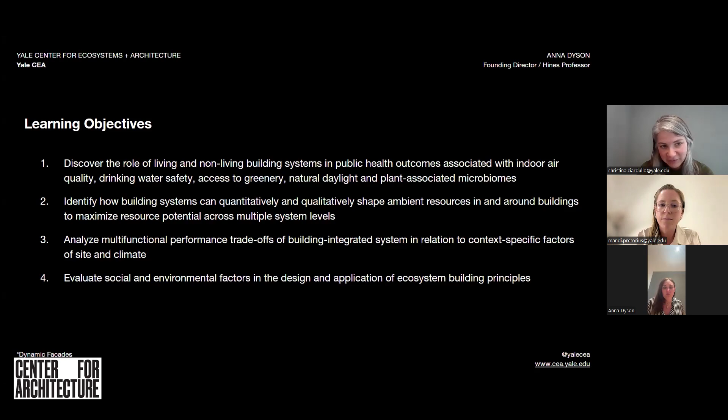Today we're going to be looking at three different system areas: energy, air, and water. And Anna, if you want to.

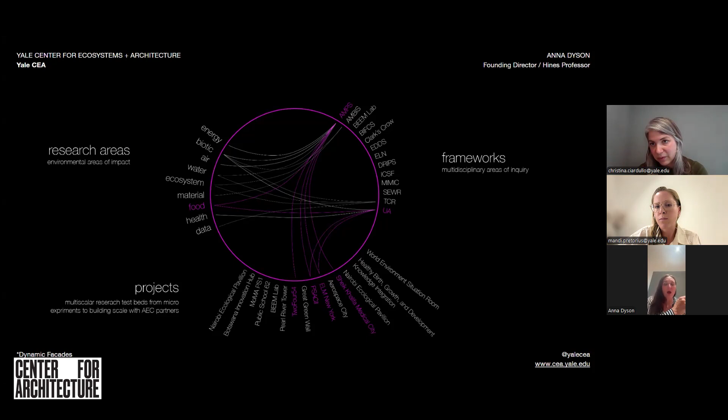Sure, this is a great diagram that Christina put together that shows the interrelationships in the way we parallel track. The projects would be building projects, so if anybody has building projects with the ambition for a next-gen system, these frameworks relate to our research areas of inquiry. All of our systems look at the nexus between energy, water, material life cycle, air quality, etc., but we tend to drill down on each of these areas in specific ways, which we'll show in a minute. Next.

Next, that's a system we'll show you, but just a few words about our center: we are really intersecting, as we said, all of these different fields.

One of the things we try to do is create new types of frameworks for learning. One of our frameworks is called SEVA, Socio-Ecological Visual Analytics, and we have BEEM Lab, Built Environment Ecosystems Measurements Labs. You're looking at an image of a group getting together in BEEM Lab, where you can see the physical model in the foreground, but also a fully immersive environment that's enveloping and wrapping the whole room.

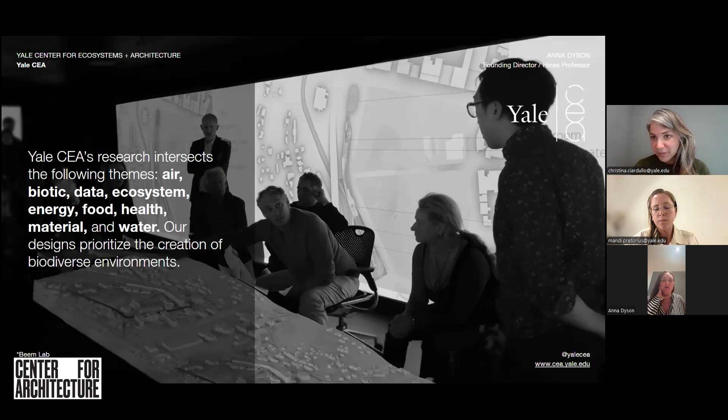We recently demonstrated the first pass of our Drought Resilience Observatory in Saudi Arabia in another BEEM Lab, and we will be demonstrating the BEEM Lab concept also at COP30 in Brazil this November. So we do a lot of international events where we bring people around the table to look at the interface between ecosystems and built environment.

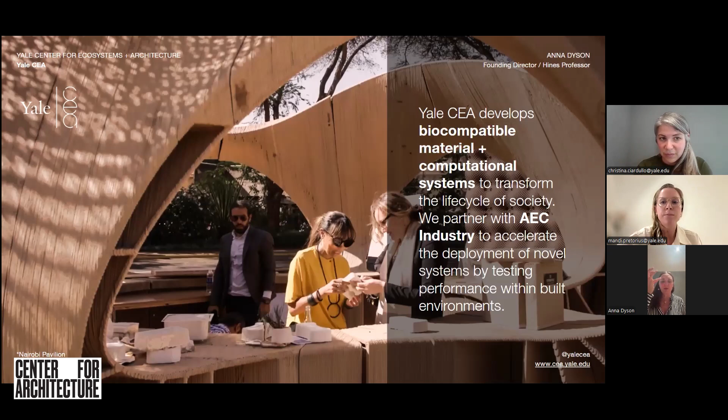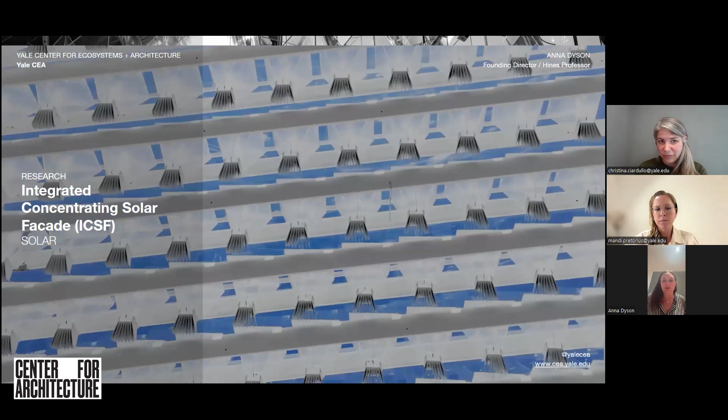Christina gave the title of this talk as Beyond Efficiency. So we don't want to just bean count the photons and electrons around the room. We want to say, are we giving beautiful daylight? How much daylight? Are we taking the heat off and being able to redirect it or store it for really usable purposes? Not just hot water, maybe that would be the lowest hanging fruit, but potentially drive cooling with a higher temperature heat. So this is a very, very ecosystemic system, even if it looks very mechanical. Here, this is looking at a video inside our ecological living module.

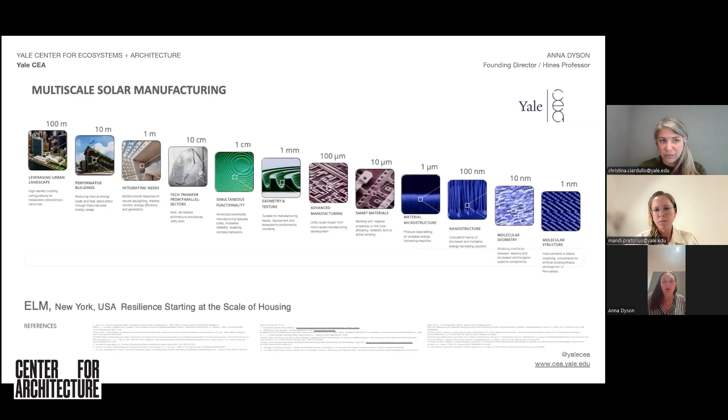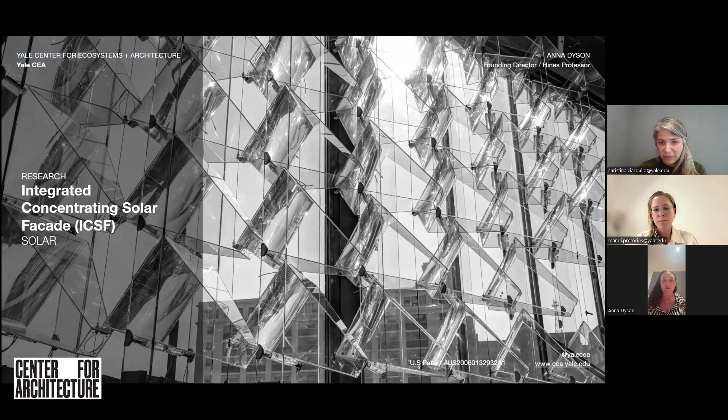So next. We can probably go quickly through these next ones. I'm going to skip through this. This is just to say that we are looking at the ecosystem at all the scales, all the way down to nano. So these are systems that are literally nanotechnology. They're optical, it's semiconductor, it's all of these things coming together. Here's another view of another version of this system in New Lab. That was actually the window that you were just looking at. And this is a diagram.

As you all know, conventional systems are probably 14% efficient at best if they're being well maintained with a conventional solar panel, but it's really only doing that. So you can imagine it's wasting all of the rest of the heat. Sorry, all of the energy is lingering around the building as waste heat if you're in a conventional hot, humid climate like we are in New York City. So you might actually have a net negative with a lot of solar panels, depending on the way that they're installed. They might be heating up your building when you're trying to actually take electricity off.

So this is really giving you the principle of all the systems that you're going to see today, is that we want to be doing so many things with the energy that's coming through. And in this case, I would say it's still a system that's far more advanced than a lot of the systems that you see on the market. But it is using all of the known technologies that we have today. The novelty is in the assembly. We don't have to actually invent a material for this to work. Next.

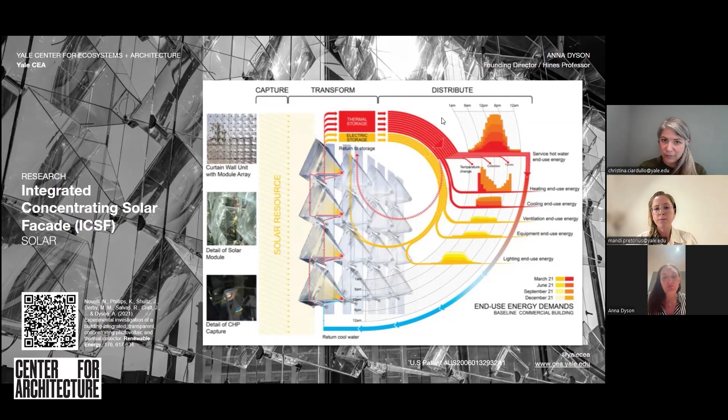Next, Christina. Yeah, sorry. In this case, we're actually inventing the materials. So on the right-hand side, oh, sorry. If you just, sorry, just with the advanced materials.

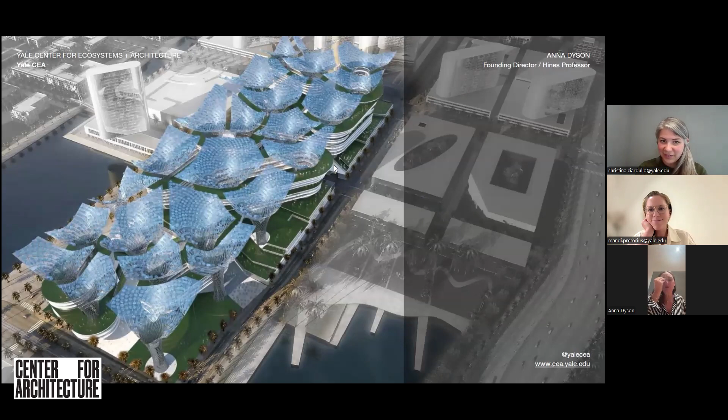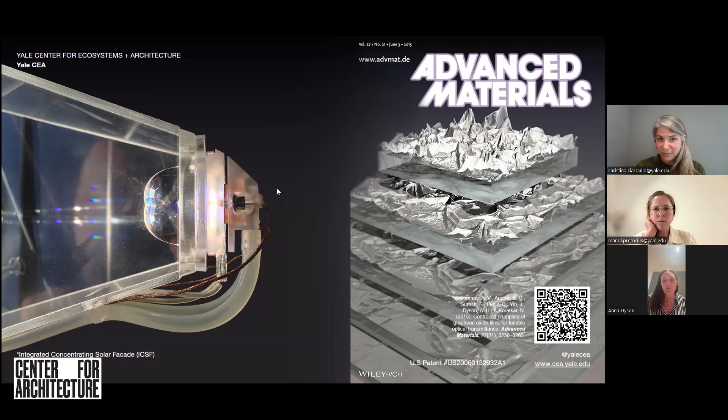So scaling up to the very large scale, this is an example of a competition that we did with Skidmore, Owings & Merrill. We were working with them a lot on speculative projects, but also on built projects. And this is looking at how you can literally transform the climate. This was the Middle East, where there's a lot of sun that you can collect, but you can't really spend much time outdoors. So these larger scale solar collectors are able to create a complete microclimate underneath those umbrellas, so you're outdoors, and it can also become a generator for the rest of the neighborhood. Next. Next.

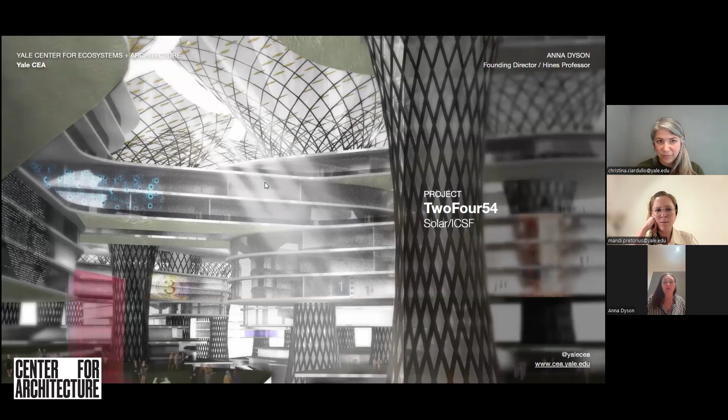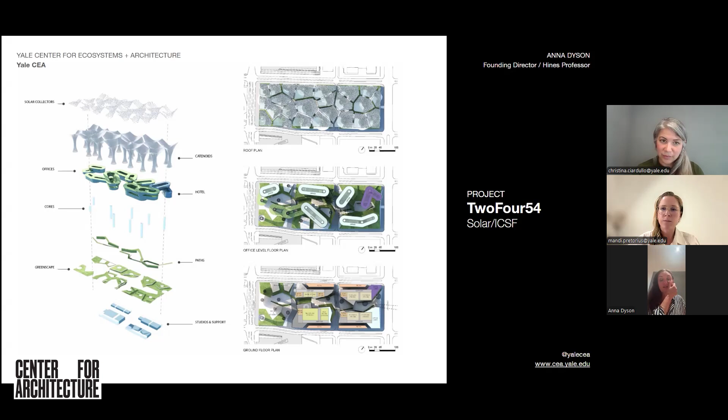So this is an ecosystemic approach where we were looking at everything from airflow to the vegetation types to water retention to water collection. Those big canopies were also obviously collecting water. This is probably as large as we would go, district scale. Sometimes we are interfacing with folks from NASA and NOAA at the regional scale, so we go all the way up to regions and sometimes countries. But really, our sweet spot is a few blocks at the district. You can do so much in creating a completely self-sufficient ecosystem, if you will. Next. Next.

So you can see the vision of the savanna from the window. This is an early rendering, but you can see the concentration of biodiversity inside these courtyards, which has really come to fruition in the photos. Next. Hopefully we have some photos of this. Yeah, and you can see how the floor plates were remaining very shallow so that we can actually power them through the ICSF solar facade. This is a rendering of the ICSF solar facade inside those clerestory windows facing north, because this is the southern hemisphere. Next.

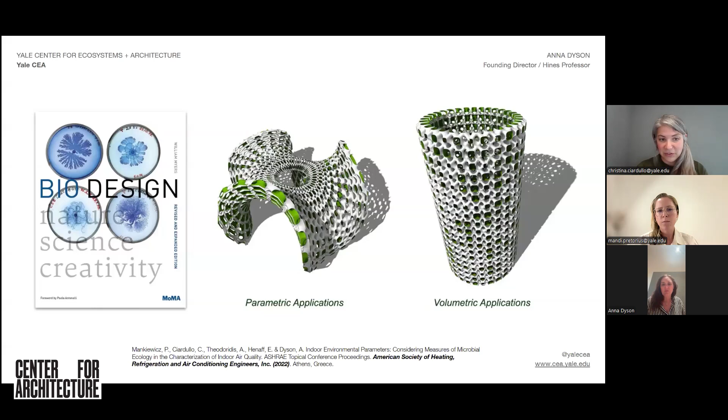And there's been many iterations of this. This also has some history with NASA research and creating enclosures that can breathe from within. We often talk about fresh air from within the building. We want to be able to reduce the energy that it takes to ventilate and heat and cool that air that's coming in. So if we can recirculate clean air in our buildings, we're really also reducing energy at the same time. And these designs have evolved over time and been featured in MoMA and in many other places.

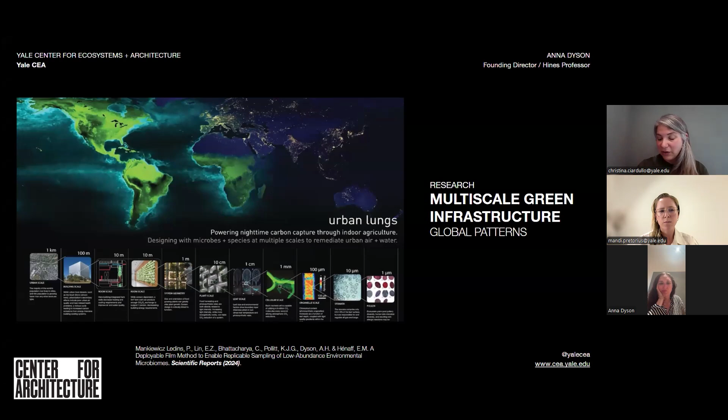And we really, again, in every one of our projects, think at this multi-scalar level. We think about what it's doing at the scale of the globe down to what the root systems and the microbes of the root systems are doing, and how that all impacts and compounds on each other and influences how we were able to scale these systems and what they mean and what influence they could have.

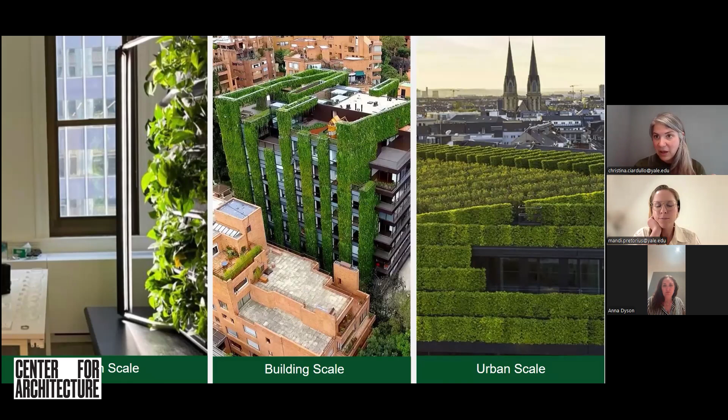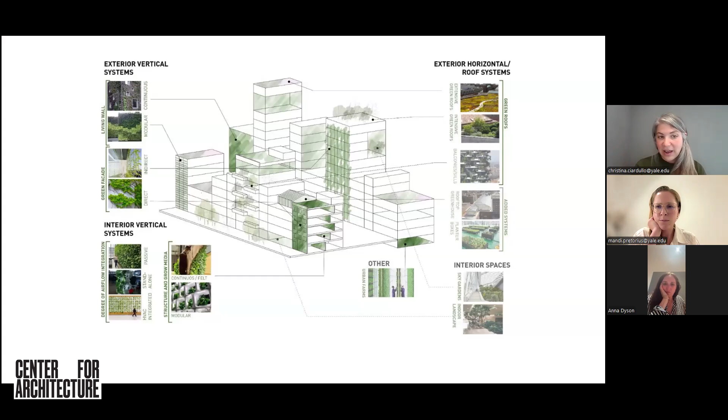So while the AMP system is one type of system, there are so many different what we call building integrated vegetation systems, everything from green roofs to green walls and trellises, and of course our active indoor modular system. And all of them have different performances. And regardless of us drawing them, the mandates are coming for them. This is an older list of municipalities that are starting to mandate these things. And I think we're headed towards more and more of this.

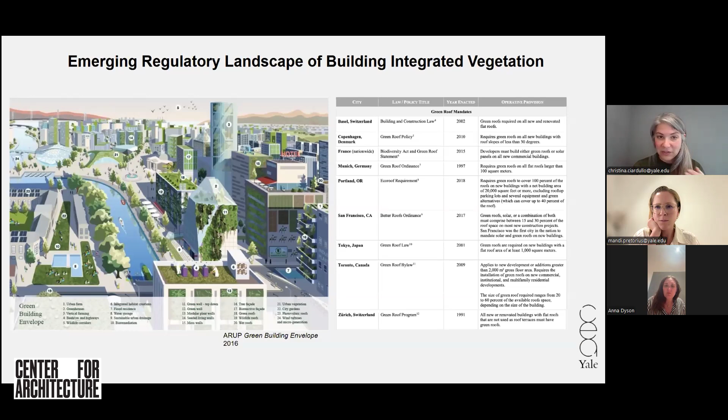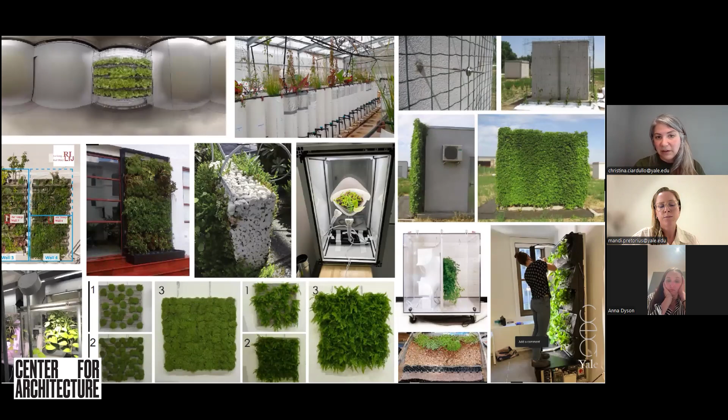So there has been a consistent body of research in many, many different fields in order to understand what is the performance of these systems. And we are doing an incredibly large amount of that research here at our center.

And we're using that information that we get at the system scale. We're developing these systems, we're prototyping these systems, we're taking data, we're measuring them at a room scale or a zone scale. We're taking that information to bring that back to what kind of performances do we need to get out of those systems. We're projecting that into what does that mean for the impacts that it can have at an urban scale, whether that's energy or air quality or other things.

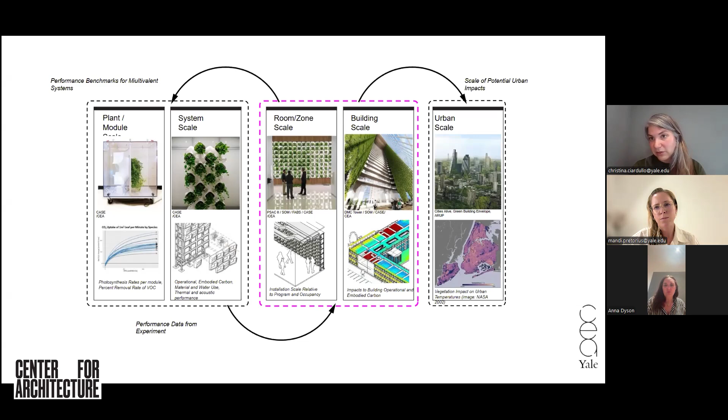And this is sort of the hope, that this research not only lives in science centers in multiple different scientific areas, but that we can understand its impact and influence so that we can start to understand how these systems can become more viable. And there's not only one way that we can value these systems.

And one of the projects, sponsored also by the AIA, was understanding how are we going to value these systems? How do we understand the value of them? And how do we understand the performance of these systems? And, as we said, there's many different almost siloed disciplines: someone is looking at water quality and stormwater management, and somebody else is looking at carbon sequestration, and someone else is looking at biophilia.

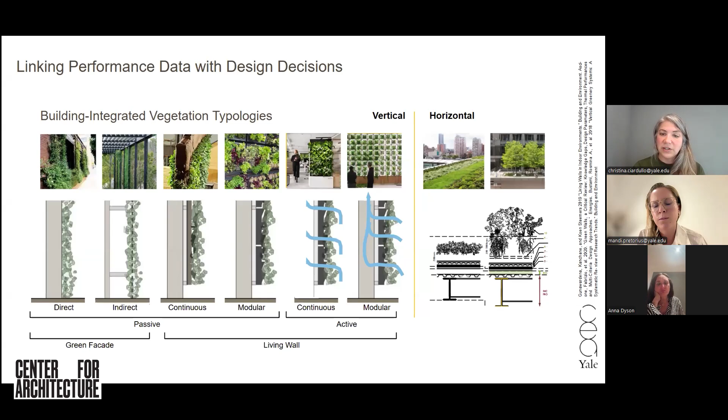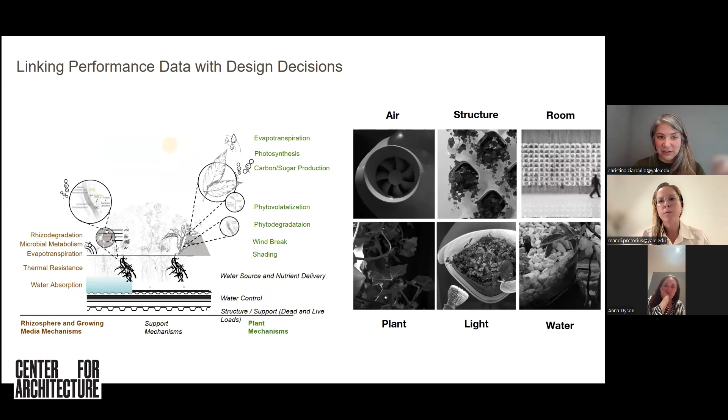And our attempt at an ecosystemic system is to understand how we can combine all of those things. So how can we look at all of these different typologies of building integrated vegetation and understand what about the designs of each of these things is impacting what kinds of performance? What are the mechanisms of those surfaces that grow things? And what are the design features that impact those mechanisms, whether that's photosynthesis or evapotranspiration or thermal resistance or water absorption or any of those things?

And we're trying to project what all of those design variables, whether that's the choice of species or the choice of irrigation structure, or how much airflow is being pulled or pushed through the system, or in which direction, or what kind of growing media you're using, and what impact do all of those things have on each of these different aspects of performance that we're interested in.

And why are we interested in all these aspects of performance? Because we have so many stakeholders in the built environment. We have the owners and operators, we have the designers, we have the occupants, we have the greater community, and all of them are maybe interested in different things. An operator might be more concerned about how much energy reduction we can get if we're having a green roof, whereas the occupant is much more concerned about the air quality of their environments or the biophilic aspects of it, whereas maybe a municipality is interested in the biodiversity and the increase of native habitat.

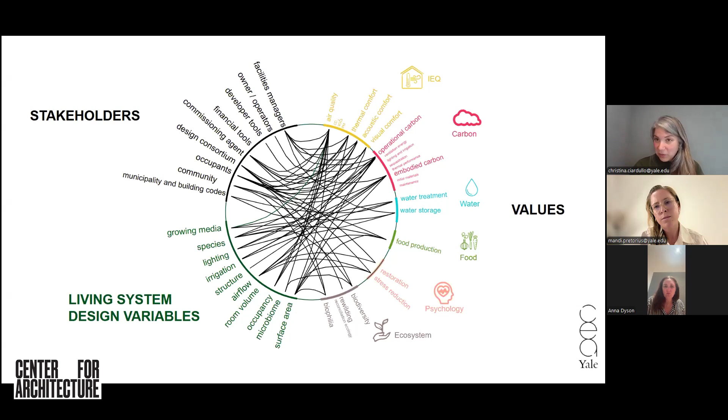So all of these things are important to various people, and we can achieve those in a living system that is designed to perform. So we're tracking what are the performance indicators in each of these areas, whether that's CO2 or parts per million or VOCs. What are the different design variables? So for example, leaf area is going to be really important for photosynthesis. The more leaf area you have, the more carbon you can take out of the atmosphere.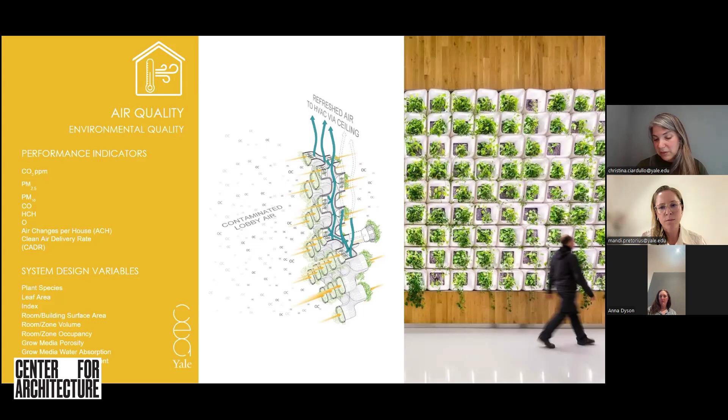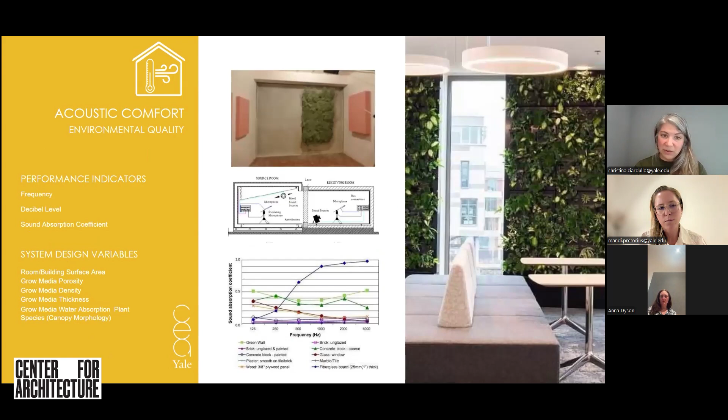The growing media is going to be really important in terms of how much air you can be drawing through the system and how much surface area you have around the roots of the system to remediate air. Similarly, we can talk about thermal comfort, whether that's interior, exterior, microclimates, evapotranspiration. Acoustic comfort: that growing media, again, is going to be really important in absorbing sound, maybe more important than your leaf area.

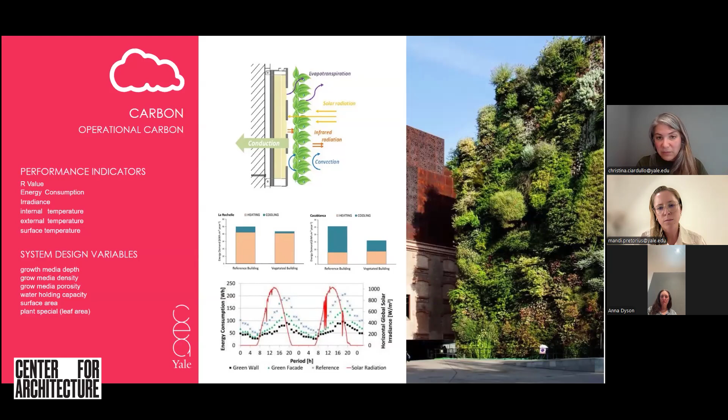The impact on operational carbon is a really important one, and I think probably the most exciting one for a lot of architects, that it's more tangible. Can we really reduce the cooling loads of our buildings by having what's basically a thermal mass on the outside? And for municipalities, urban heat island effect is probably the number one reason why at least exterior building integrated vegetation is critical. And that also will depend on your growing media depth, your growing media porosity, your water holding capacity, what kinds of plants you're growing.

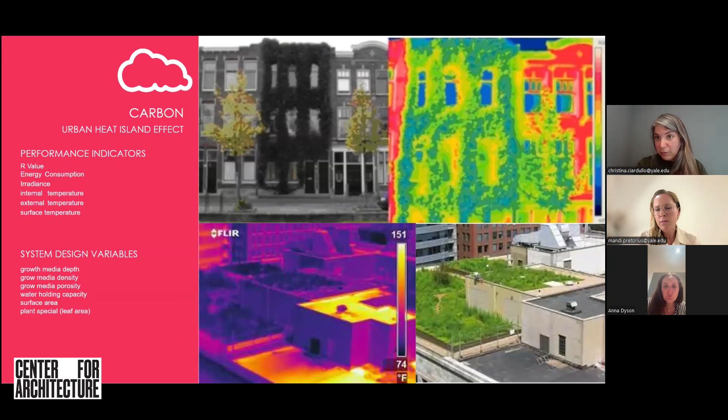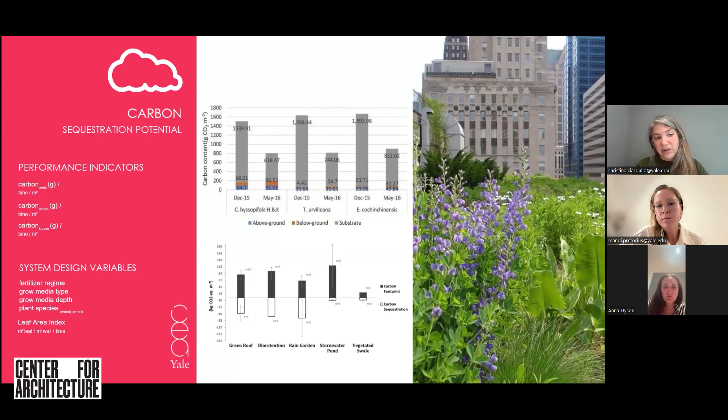If we're talking about what kinds of plants you're growing, sequestration potential, can it draw down more carbon? Well, what kinds of plants are you growing? Are they more woody plants? What kind of depth of the soil do you have? Do you have water holding capacity? All of this basically comes together.

Of course, we're interested in embodied carbon and the impacts that all of that can have on the weight of the system, like the steel, all that water and soil. Does that potentially increase the structural requirements of the system, or do we start using lightweight media and reduce the embodied carbon? But as long as we're thinking about all of these things together, we can start to design a more ecosystemic system.

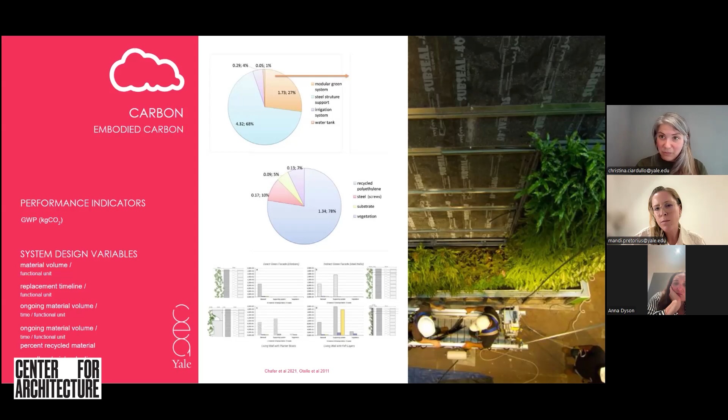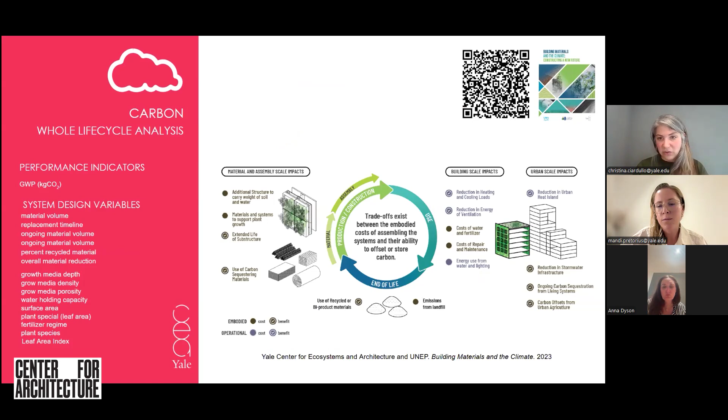So this was from our Building Materials and the Climate report, where we were really trying to put together all of those impacts on operational and embodied carbon over time. What are the different impacts we need to be thinking about, really in a whole life cycle point of view? I won't go into the rest of these, but of course we're thinking about stormwater treatment and water treatment. Currently, water treatment using these systems, also for water quality, and Mandi will go more into water quality, is something that we're really interested in right now.

These systems can produce food. What impact does it have on urban agriculture, biophilia, and generally ecosystem health for our environment? And if we track all these things together, we can start to understand and express more of their value, so we can work with them.

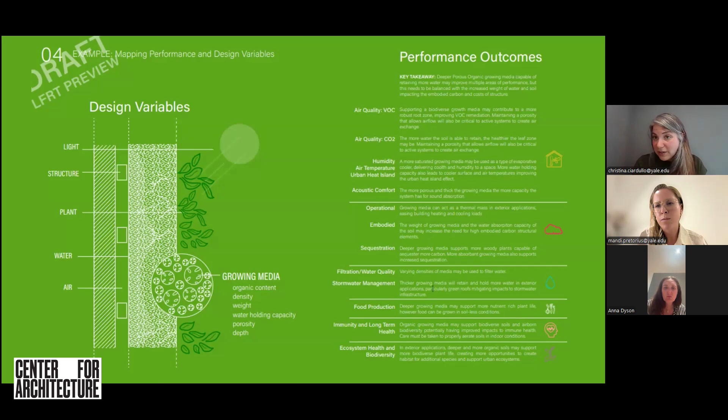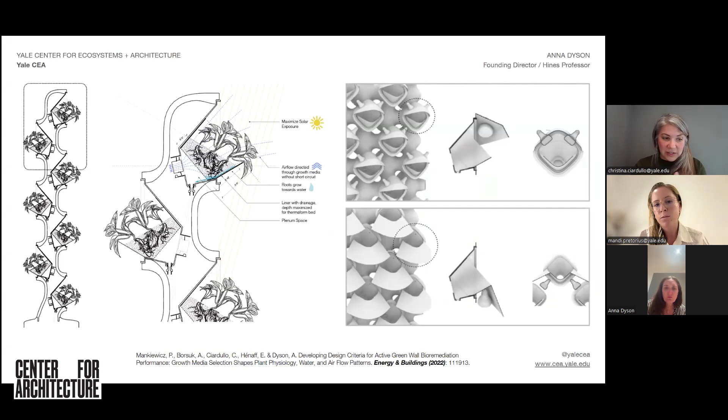We're designing this with the AIA Future Forward grant from the Young Architects Forum and the Large Firm Roundtable. We're developing a building integrated vegetation toolkit to speak to architects about, if you're considering these systems, what do you need to understand about them? What are you trying to do? And we, Yale CEA, are continuing to evolve designs, continuing to test, continuing to develop different aspects of it and test them in both isolated chamber type experiments as well as in building projects.

And this is a fantastic building project. It was completed a couple of years ago with SOM and CASE and Anna at Yale CEA. We were able to integrate this beautiful AMPS, the active modular phytoremediation system, into the lobby of the Public Safety Answering Center.

This is a building that has to close down in the case of an emergency. This is where we would have first responders and people. In case of an emergency in New York City, the building has to shut down and be on its own. So the idea that we could circulate fresh air from within this building was a really important one. And as you can see, the mechanics that went into supporting the plant life in this wall are constantly evolving over time. These different designs are evolving over time.

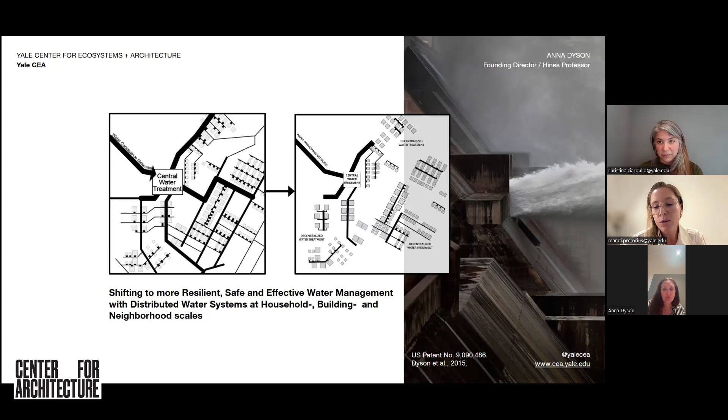Over the last 5 years, the typical household's water and sewer bills has increased by 24% in the US. And for instance, in a state like California, over 19% of the electricity consumption is actually going towards the delivery and treatment of water. So shifting to smaller systems...

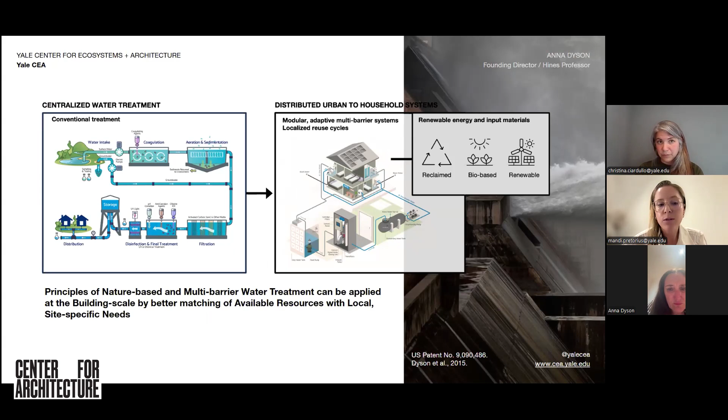We can actually apply many of both the nature-based principles as well as the techniques that we have already used with conventional centralized water treatment, but making it more adaptive to its exact context. Really use principles of reclamation, of bio-based materials, renewable energy, and matching available resources with local site-specific needs.

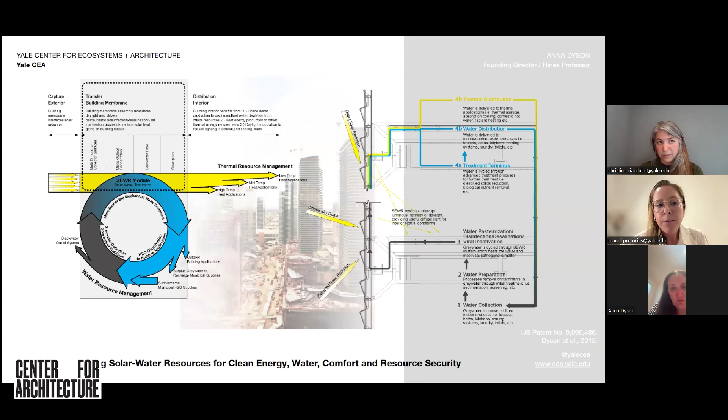So here's an overview conceptually of really the systems approach to interfacing with environmental resources in and around buildings and using it as a way to shape both heat, light, and our needs for safe drinking water to the occupancy directly.

Principally, the approach can take on many different embodiments. So maybe what you saw there was an application within a multi-story building in a dry climate such as Las Vegas. But really what we're understanding is the relationship between the resources and how we can best meet needs.

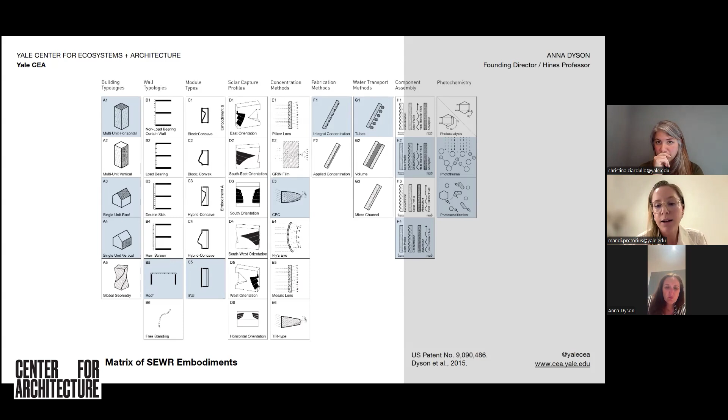So this overview of this matrix of different embodiments shows how in completely different contexts, there can be ways that we bring solar into the building. We concentrate that solar energy for different applications, really here focusing on water disinfection, and then also allow that optical shaping of the light for other multifunctional purposes in the building, such as cool daylighting, mitigating solar heat gain, and other thermoregulation processes that we would want to, and how we would use that available energy.

So for instance, here's one embodiment. You might think of it as a glass block module. Really, it's addressing a type of climate where it's responding to the angle of the sun.

It's taking in solar energy and really concentrating it in different types of optical approaches, but then shaping how some of that cool light enters the building. We can work with different geometries and also different material properties, different surface applications, where we kind of spectrally use the qualities of the sunlight for different applications.

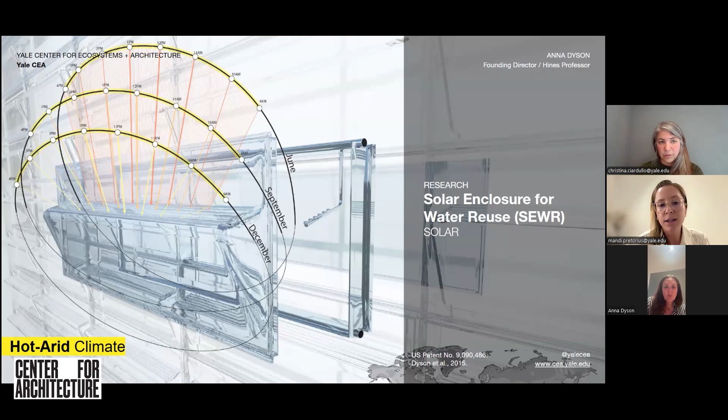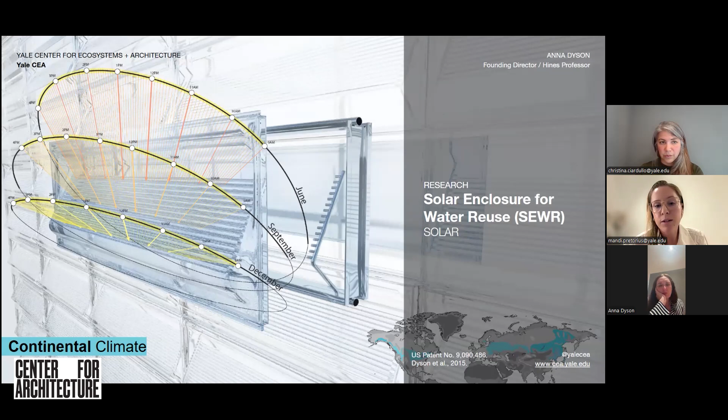Here you can see more of a continental climate where you've got your geometry shaped and responding to the changing inclination of the sun. Another embodiment, really ultimately to demonstrate different ways that it can be adapted for different sites.

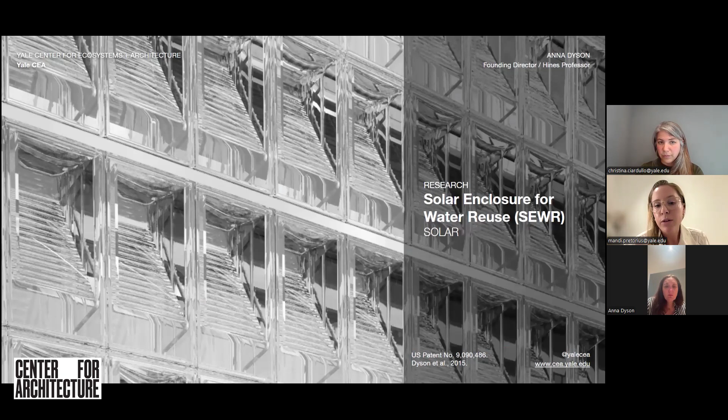As we will show now, there's an application we've been looking at and we'll be demonstrating as part of the Ecological Living Module program that we have with the UN, UNEP. But really, this is one embodiment that's actually taking a different approach and really looking at ways to make it low cost and viable for immediate household settings.

So really adapting to conventional roofing assemblies and then really achieving what we're talking about, which is really providing safe drinking water, delivering heat through domestic water heating, and then also shaping cool light for the interior.

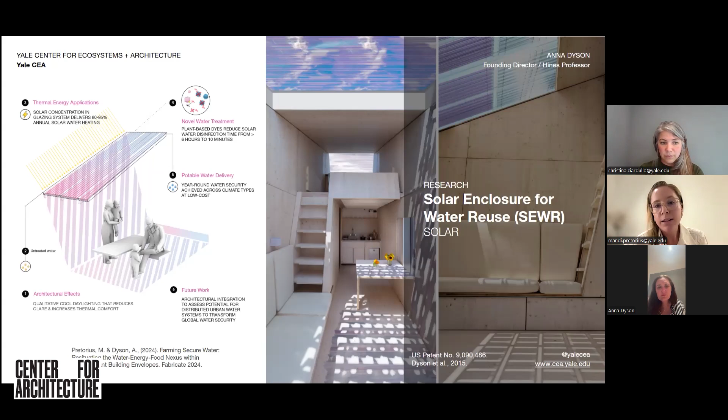One of the ways that we're really achieving safe drinking water is through the novel incorporation of a photosensitizing dye that is part of emerging university research. In here you can see how the dye changes from pink to clear, and this is an indication of when water is safe to drink.

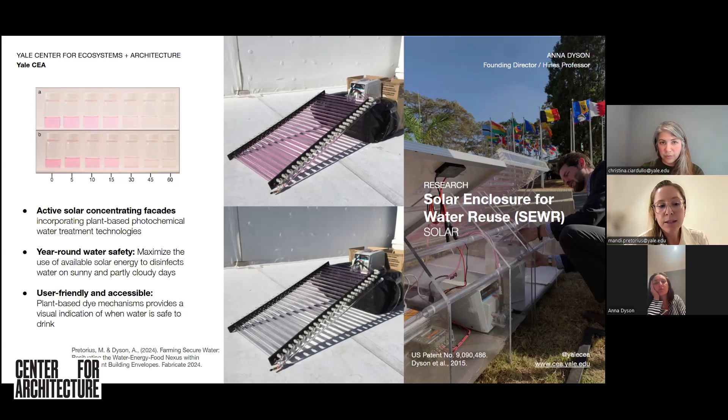It's very effective against viruses, so it really reduces the time that it would take to treat water, particularly in comparison to conventional solar-based disinfection techniques, providing year-round water safety. And that's really a goal for these types of systems, while also remaining user-friendly and accessible.

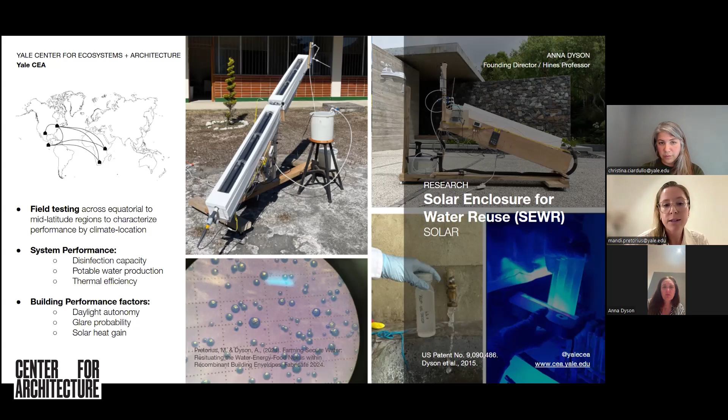As with all the research, we work with different field testing models as well as different applications within different building test beds. Here you can see some example photos from sites in South Africa and Guatemala where we did a range of microbiological, thermal, and optical efficiency testing, and really how then all that characterization can better help us understand building performance factors such as daylight autonomy, glare probability, and solar heat gain. So we're really understanding how the system works as a solar collector, solar disinfection device, but also as a window, and how it shapes sunlight and view.

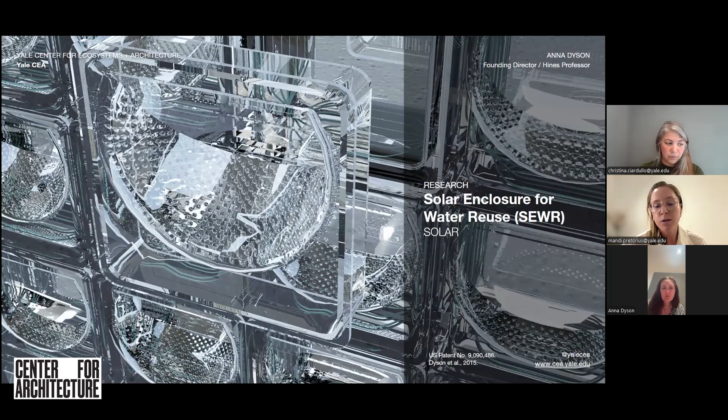And so, to close, this is another embodiment we're currently working on: the integration of novel ambient water harvesting materials. We're not only shaping sunlight, but actually shaping the material properties diurnally in terms of ambiently harvesting water, with sorbing and regeneration cycles programmed into the geometry itself. A lot of this concept was published in the recent Fabricate 2024.

So maybe to close, one might ask the question of why we're involved in the microbiology of water and other things. I think the answer is we only have so much square footage on our buildings, and we need to do so much more with them in the 21st century. We want them to have overridingly architectural criteria, meaning cultural and aesthetic qualities and how we feel in our spaces, but they also have to do so much more than just keep the wolves out. We've got to be able to transform our energy and our water through these surfaces and assemblies.

So the integration of these things—another thing to note is we put the word 'health' in our title. It's important to note that all of these systems, if you look at the plant-based system for example, we've gotten data back on preliminary experiments with subjects showing a change in heart rate variability and breathing rates and other important health indicators in 20-something subjects within one hour of blowing air from the green walls into conference rooms and classrooms. The subjects don't even know plants are part of it, so there's no biophilia effect—we're controlling for that. The bottom line is that we need to design with ecosystems and biodiversity because we've evolved over millennia to coexist with these other plants, animals, natural daylight, and all the conditions of natural ecosystems.